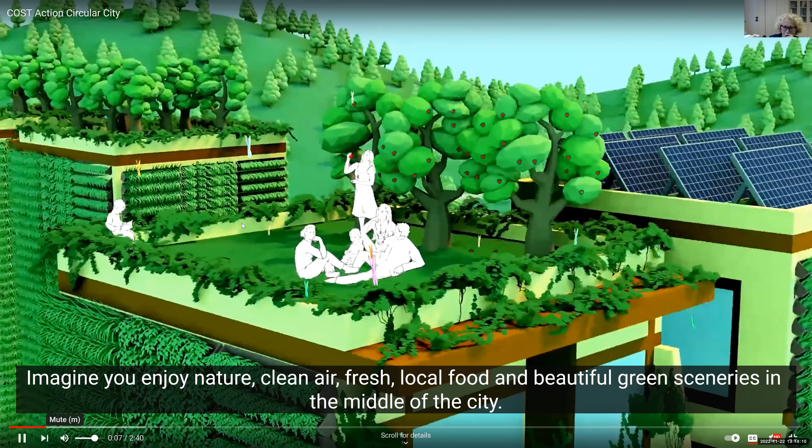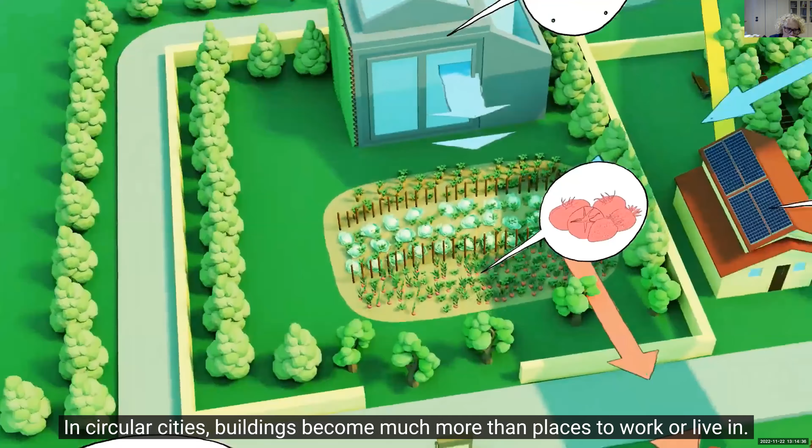Imagine you enjoy nature, clean air, fresh local food, and beautiful green sceneries in the middle of the city. Imagine cities not just as economic centers, but also as resilient and enjoyable places with nature all around us. Sounds unrealistic and too good to be true? It's closer than you think. The COST Action Circular City connects scientists and practitioners all over the world to work together on circular cities and bundle their research and experiences. In circular cities, buildings become much more than places to work or live in. Houses no longer just consume. There is a give and take with the surrounding environment.

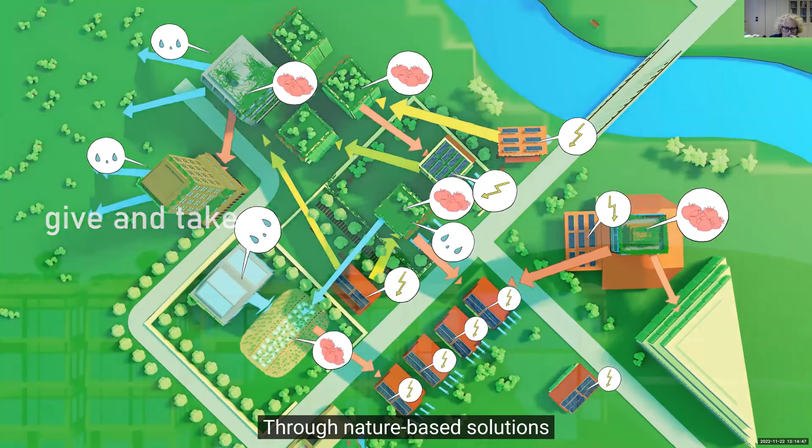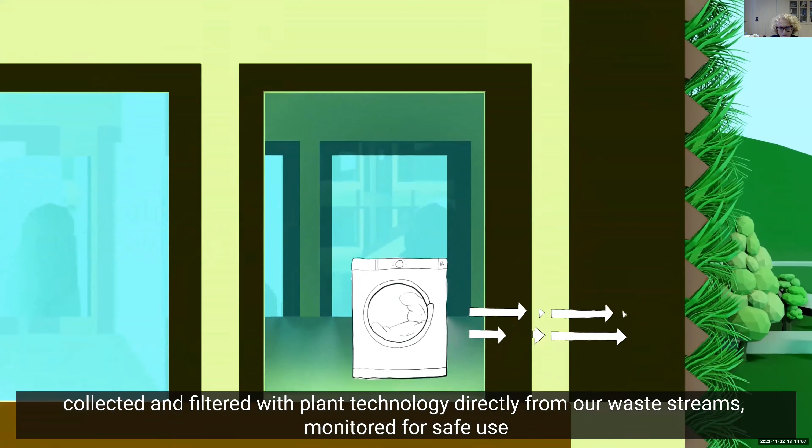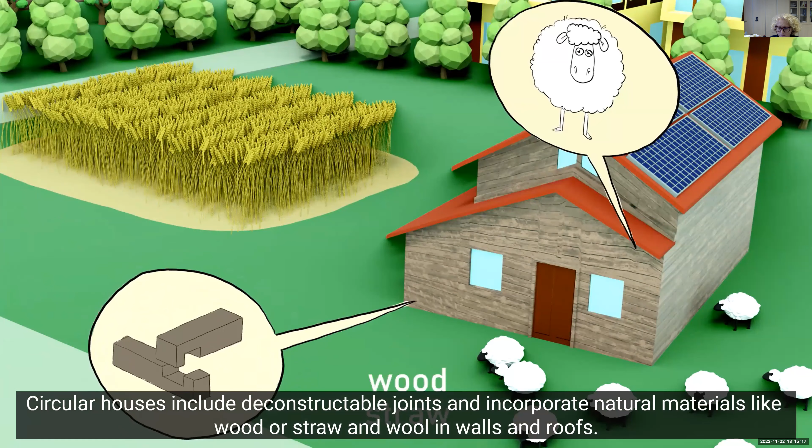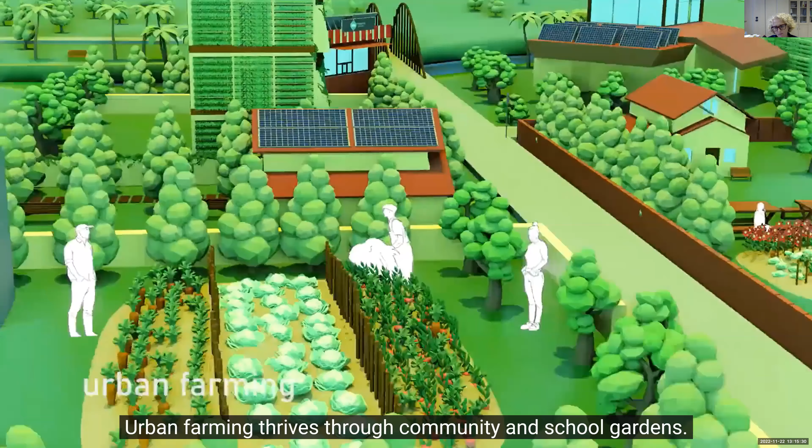Through nature-based solutions, they store energy and provide high-quality service water and nutrients, collected and filtered with plant technology directly from our waste streams, monitored for safe use. For all kinds of integrated food productions, like edible walls or vertical farming, rooftop gardens, mushrooms harvested in our cellars, up to fish breeding in aquaponics. Circular houses include deconstructible joints and incorporate natural materials, like wood or straw and wool in walls and roofs. They contribute to biodiversity and create beneficial microclimates that prevent heat islands, droughts, and floods. Urban farming thrives through community and school gardens. Public spaces become lively areas where water and plants create a fresh climate, even in summer heat, and nature-based solutions absorb stormwater and bind CO2.

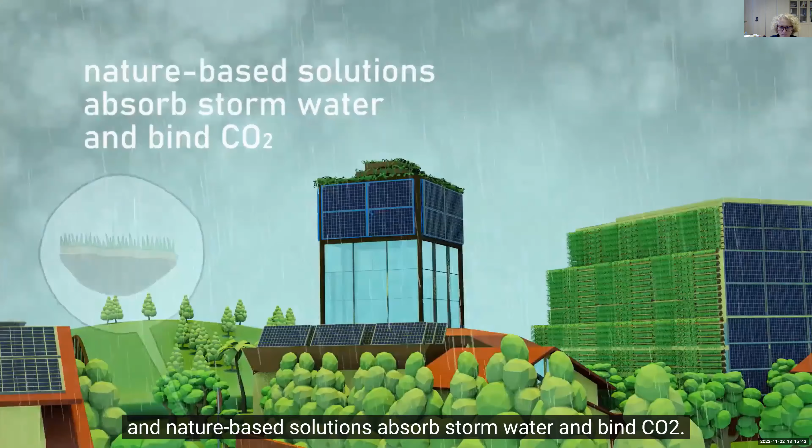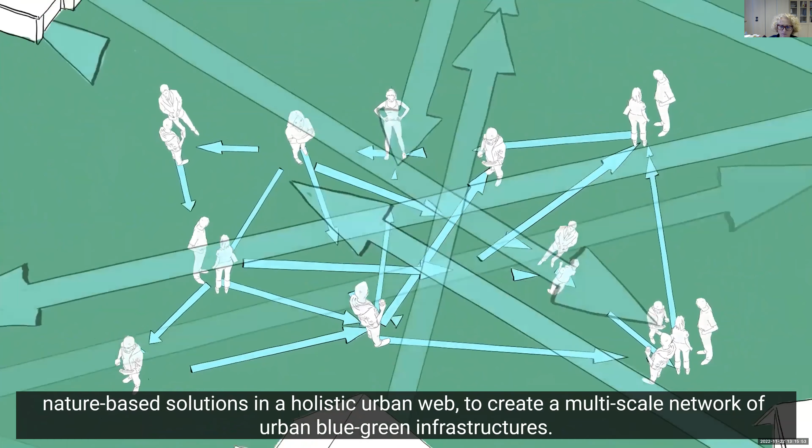Involving a large number of stakeholders and their interests, COST Action Circular City combines the superpower of nature-based solutions in a holistic urban web to create a multi-scale network of urban blue-green infrastructures. Benefits are not just ecological, but also economical and social.

This Cost Action gathers experts all over the world with the knowledge, expertise, and tools to support you in your communication, planning, designing, and assessing of circular cities. We present sound solutions to the decision makers and implementers so that we can start building the cities of tomorrow today. Contact us now.

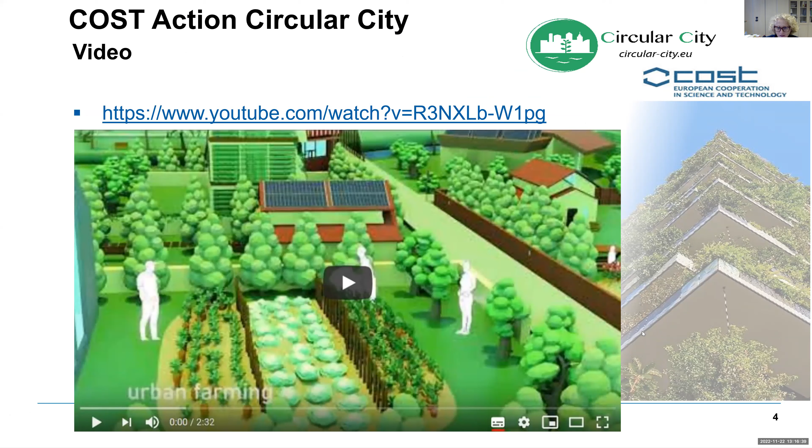Okay, so that's our cost action, dealing with all sorts of aspects of circularity in cities. And for that, you can imagine we have a large network of people working on this cost action, and we have basically involved all eligible countries plus associated countries.

I'm sorry. Millions of people all over the world. I have to stop this. Sorry. So basically,

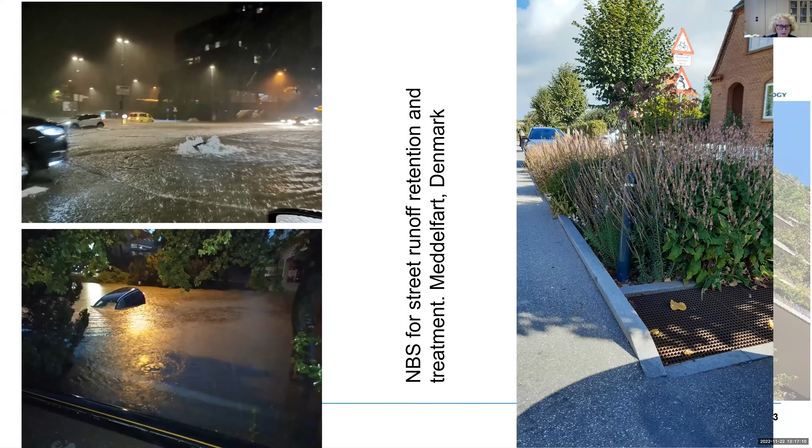Here we are. So basically, we have a network of more than 640 persons interested in the cost action and working together on nature-based solutions. The main deliverables of our cost action you can find basically in two special issues. One is Blue-Green Systems, where we did a large revision of the state-of-the-art on existing nature-based solutions. So there's a collection of papers.

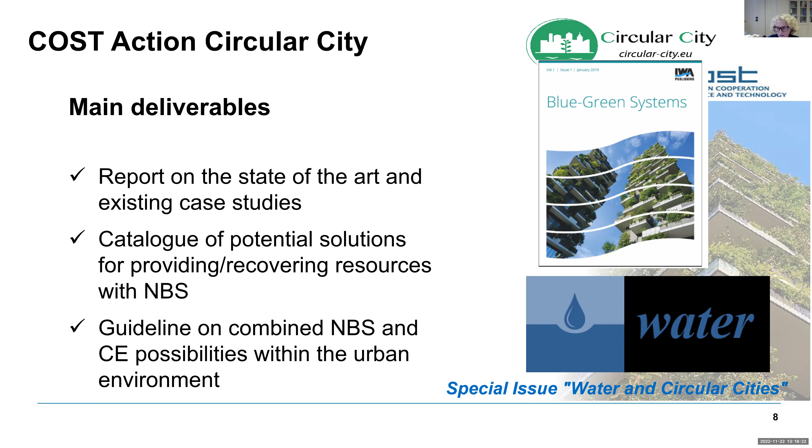And then the other one is a special issue in the journal Water, where we presented in a series of papers a catalog of potential solutions for addressing the urban circularity challenges. The last outcome of our cost action is yet to come, and this is basically a toolbox, a platform for estimating the efficiency of nature-based solutions or combined nature-based solutions to address certain urban circularity challenges.

So the framework that we have developed in this cost action is composed of a catalog of technologies. First, of course, we defined and specified better the urban circularity challenges, which I will show in a moment. But then we cataloged nature-based solutions in a sense that we define them as units. And a nature-based solution is actually a combination of these units.

And of course, we are doing the analysis of inputs and outputs, or better say, the streams of resources that are going through these nature-based solutions. So in a way, if you compose these nature-based solutions in an appropriate way, they will provide circular streams. That's the goal. So this is the catalog of the nature-based solutions. All of them are described and specified more in detail.

So we have identified 39 units, 10 supporting units, and 12 nature-based solution interventions. The supporting units are not really considered nature-based solutions, but they are helping nature-based solutions. So particularly when we talk about circularity, if we talk about resource recovery, then we have a set of options that can help nature-based solutions to recover, for example, phosphorus or energy or other resources.

But we have 7 groups of nature-based solutions. So here we have the rainwater management group, remediation, treatment and recovery, food and biomass production, public green space, vertical greening systems, river restoration, and soil and water bioengineering. Of course, all of these units are multifunctional. If you have a unit from rainwater management, it can also be a unit that provides food, for example. So they have multiple functions, and this is basically the point of nature-based solutions, the multifunctionality.

Now, about the urban circularity challenges, of course, these units were cataloged in this way in order to address these challenges. So it is kind of a framework that we have composed so that we can systematize the use of nature-based solutions. It's a conceptual approach. And basically, the 2 general challenges of a city are how to minimize the import of new resources and how to minimize waste. If we achieve these 2 general challenges, then we are living in a circle, basically.

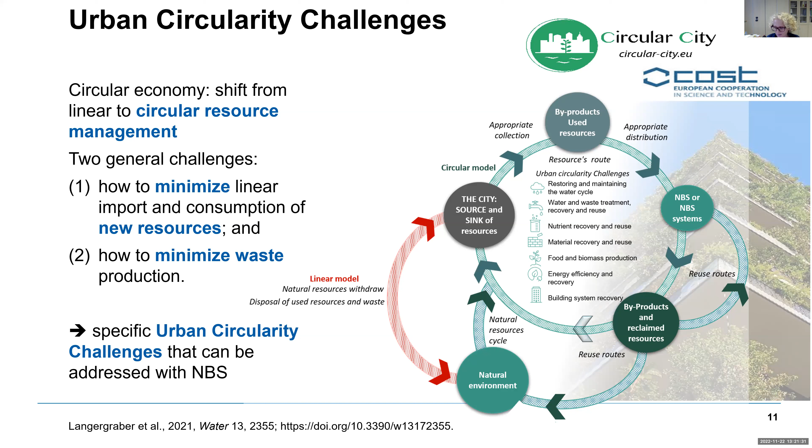But to be more specific, we have defined 7 specific urban circularity challenges, which are restoring and maintaining the water cycle, water and waste management, water and waste treatment, recovery and reuse, nutrient recovery and reuse, materials recovery and reuse, food and biomass production, energy efficiency and recovery, and building systems recovery. So these are the 7 specific challenges that are leading to the 2 general challenges.

And here we have also the urban sectors. The urban sectors are basically considered as fields of activities within an urban setting that are dealing with these challenges or with management of resources. And these are urban water management, built environment, urban farming, and resource recovery.

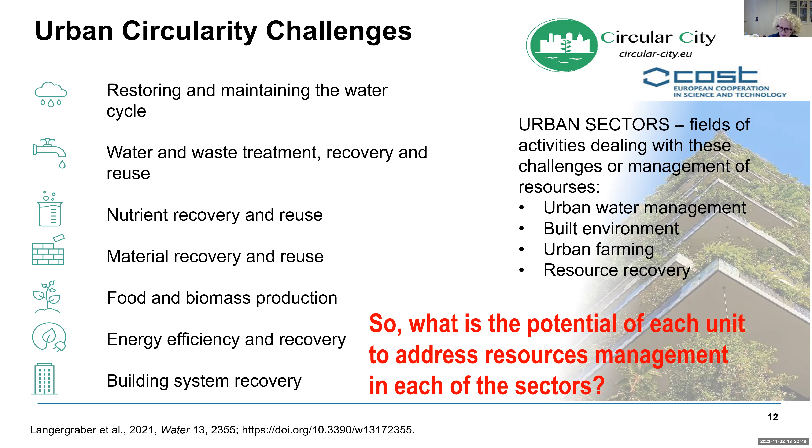So now the question is, what is the potential of each defined unit to address resources management in each of the sectors? So for this, we asked people that are working in these sectors, and we performed a series of workshops and activities in order to gather, like, we had 10 workshops.

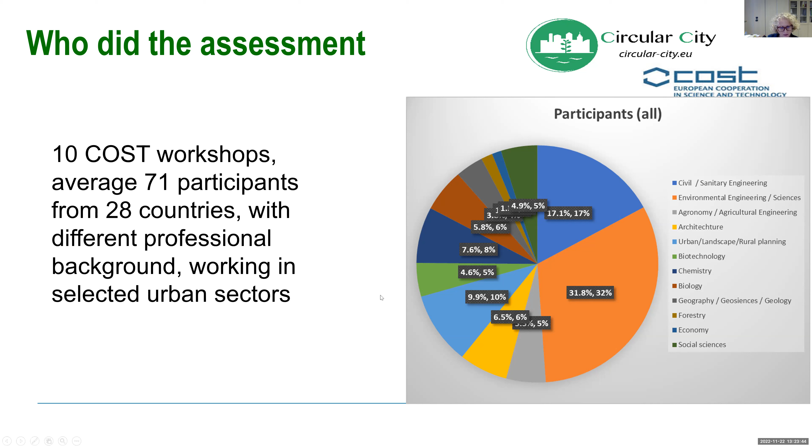On average, we had 71 participants from all the sectors and from 28 countries with different professional backgrounds, and they were working in the selected urban sectors. So this is basically a graph of the professional distribution of the contributors, and you can see that most of the participants were from the engineering profession, but of course we had people from almost all relevant professions selecting how nature-based solutions can address these sectors.

So the analysis showed two interesting results. Only 5 nature-based solution units were selected as relevant by all sectors, and these are treatment wetlands, phytoremediation, street trees, large urban parks, and pocket garden parks. And if we go to the sectors, we see that in urban water management, almost all nature-based solutions are found useful, and they can contribute to more circular management of this resource.

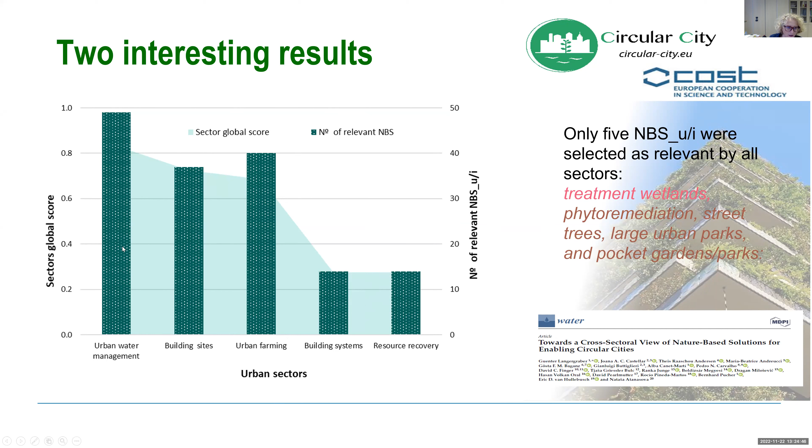Then in urban farming, we had quite a lot of units as well. And in building systems and resource recovery, a bit fewer selected nature-based solutions. So we find this quite an interesting result.

And one more outcome I would like to present: the Circular City online course. This online course captures almost everything that we have developed within this COST action. It's a completely self-paced course, and it is published on the CapNet platform. The course will be open until the 20th of December this year, but we will have another batch as well.

The course provides a learning experience that really tries to overcome the disciplinary gaps, because nature-based solutions are about that. And it has 4 modules: resources, flows, and management in cities; nature-based solutions for a circular urban metabolism; design requirements for nature-based solutions; and implementation of nature-based solutions.

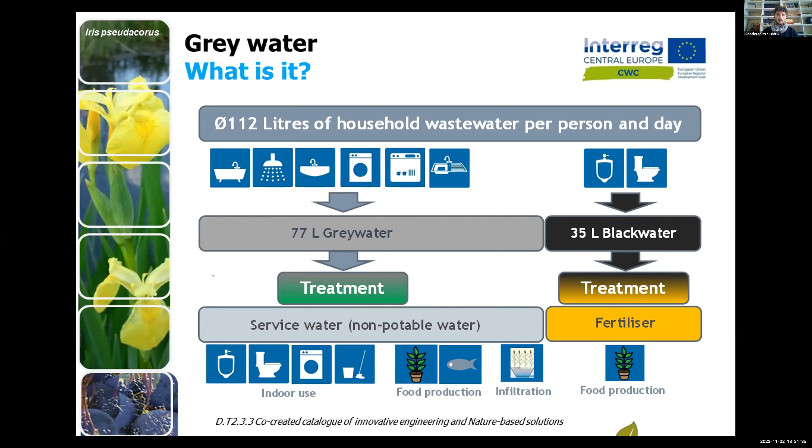So what we talk about is vertical systems for treating and reusing gray water, because NBS are quite well known for this application. Treatment wetlands have been used for at least the last 10 years for this application successfully, but we know that NBS are quite extensive solutions. So there is an increased amount of interest in trying to find alternative spaces to do this by NBS rather than gray infrastructure. In this case, we can do it also on green roofs, but I want to stress a little bit the vertical systems because it's quite innovative.

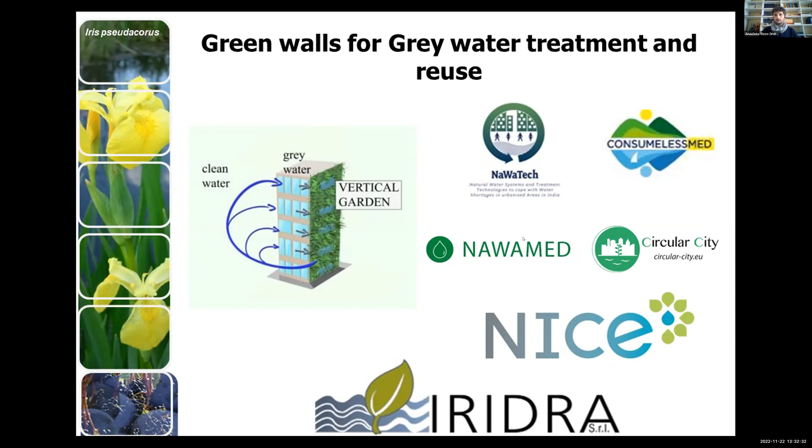And at least for us as Iridra, it is a success story that is starting back from a relatively old research project. And all these projects, I'm going to slowly talk about which was the role. But starting from NAWATEC, NAWATEC was a very big Horizon FP7 project in which Iridra was involved as a partner with many different applications on sustainable sanitation. In this project, we had the possibility to start to implement one of the very first demo sites in real conditions of a green wall for treating gray water, in the Pune student hostel.

This was a very small demo, but we immediately felt the importance to go to real scale, to see what happens with real gray water, not synthetic gray water. This demo started to be designed in 2014 and was monitored up to 2016. And this is actually the very first publication in an IWA journal on a green wall for treating gray water and reuse. So essentially, we were the first in literature that started to talk about it, and we provided monitored data about it. But it's the first step.

So for those of you that are aware of the technological readiness level definition, we cannot say that we were higher than 5 in this case, because it was really a first trial in a real environment of this application. Then, starting from this experience, in Iridra we like to do a little bit of Don Quixote, you know? So we like to try to go real, even if the evidence is not so high.

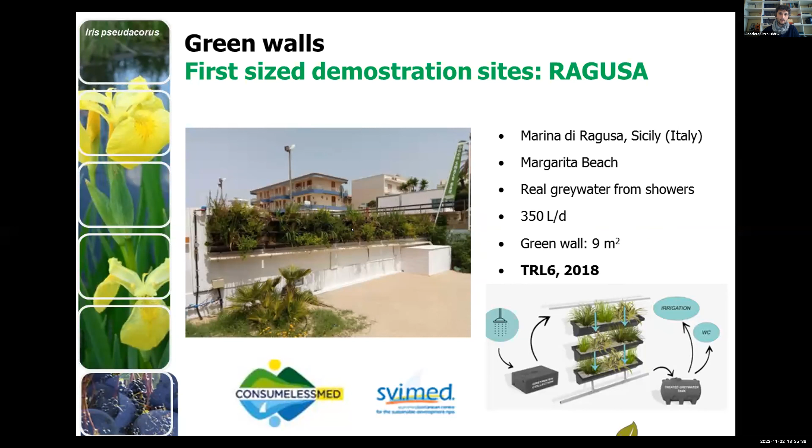In this case, it was interesting because we didn't have money for monitoring in this project, and that is the key of research and development, actually. But going to this scale started to give us important insights into which challenges must be won in order to make this green wall real, because a demo site of 2 square meters is one thing; if you start to green a wall in general, you start to have different challenges. Then, in parallel, we have also been involved in more pure R&D projects, because we were involved with the Polytechnic of Turin in collaboration with the Technological University of Lisboa in the Super Green project.

This was a small project internal to the Polytechnic of Turin, but in this case it is indeed the opposite of the demo of Consume Less. We have monitored in detail many aspects that could affect the design. So we had the evidence that we needed to properly design these systems, because we have tested different plants, different combinations of media. We had a detailed design, a detailed monitoring that tells us what is working better,

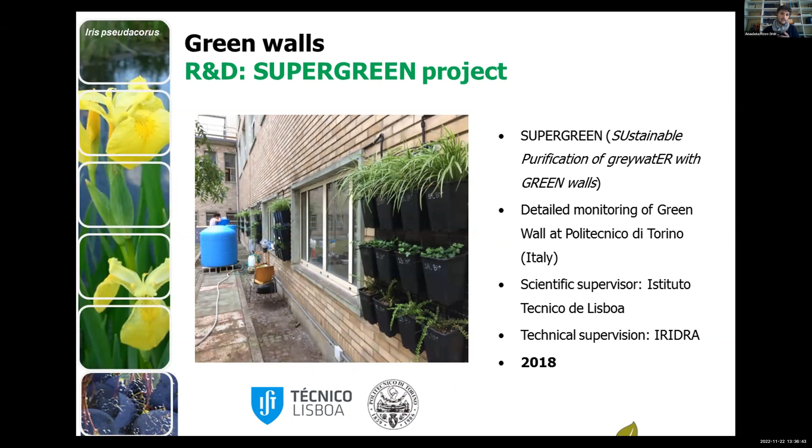what is working worse. And so, in parallel to going real in Margarita Beach, actually engineering these systems, we also collected, thanks to collaboration with academia, basic research evidence from the Super Green project. And we published, for instance, this big review, highly cited, about NBS for grey water treatment. So we have really gone through every detail of basic research, I would say in this case. We started to share the knowledge with a bigger group.

Again, in the circular city presented by Natasha, we have developed a cluster in which we share the knowledge, because this started to be talked about in 2016 in literature. So there are many research groups running in parallel, completely from scratch, with similar results. It is important to share experience and failures also. And thanks to this body of knowledge, we arrived in 2020 and realized in 2022 a system that upscaled much more.

Here we are talking about the Wall2Water systems that we have designed in NAWAMED. It's a completely different scale, because essentially we are treating 10 times the grey water of the previous experience. We are treating real grey water from the wash basin of the primary school in Ferla in Sicily. And we are covering 30 square meters of wall surface that is treating grey water. So it's a completely different challenge from conventional design of green walls,

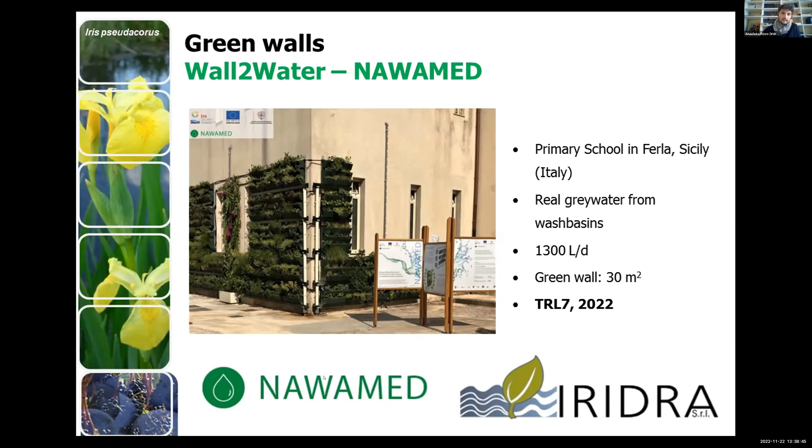because it's changing the media, it's changing the feeding systems, because we cannot use self-compensated drippers because, for instance, they can clog. We have done monitoring, design, modeling to reach a level of TRL 7, thanks again to the fact that we have been funded by NAWAMED. And here you can see it finished being installed at the end of this summer, and now it is ready to receive the grey water. And you can see some pictures.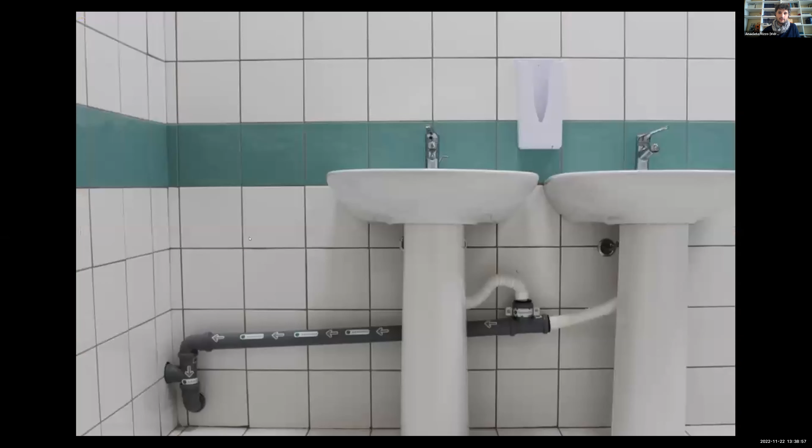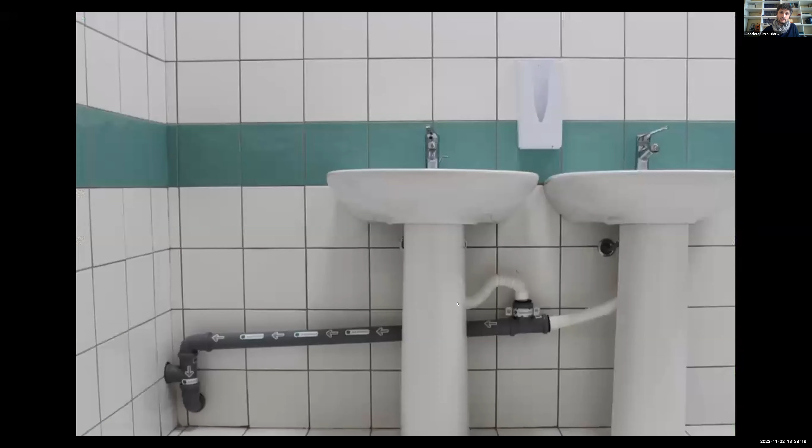I'm scrolling down. It was a challenge also to design how to intercept existing grey water. For instance, we created a separate sewer from the wash basin of the school. This grey water comes outside from the building and goes down to a pumping station that is feeding the green wall. And then this pumping station collects the grey water again and it goes back inside the bathroom of the school to recharge and be used for toilet flushing.

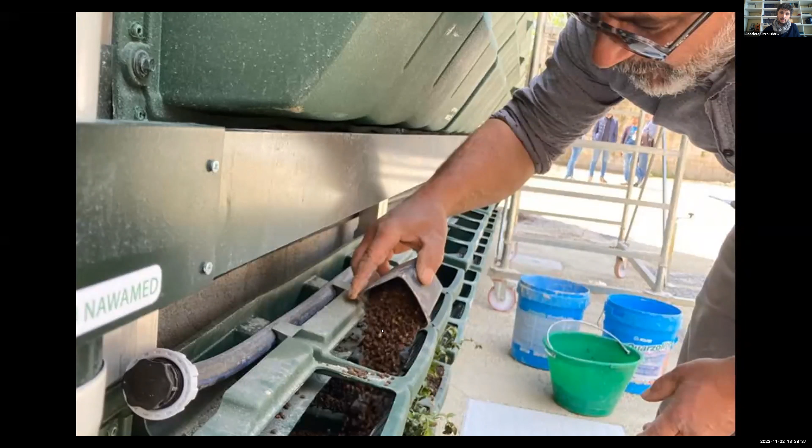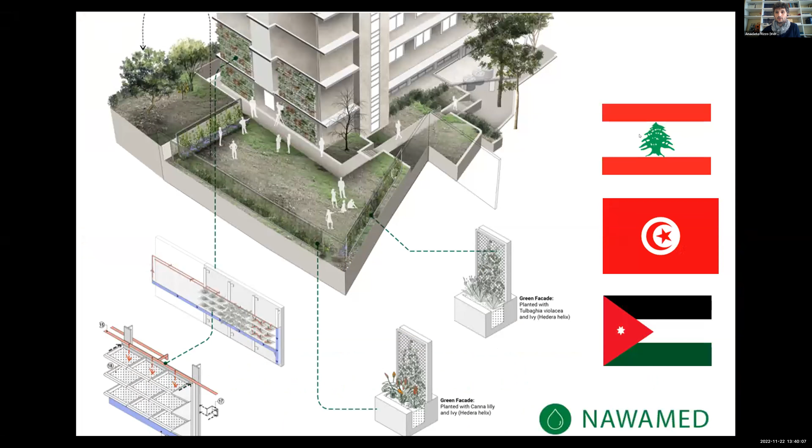We have selected the right module, the right feeding systems, the right media, the plants that could survive the environment, and it's starting to be a nice place also for sharing knowledge. We have a dedicated web page for these systems. We started to monitor these systems, and we hope to publish our results soon. This was a big step that is going to be replicated in the NAWAMED project also in other countries, in Jordan, in Tunisia, and in Lebanon.

And I want to conclude my presentation, slightly delayed, I'm sorry, telling you that we still didn't finish our job, because we have to reach TRL 9, so a solution fully available for the market. And for doing this, we are going again to exploit the possibility to be financed by a European project, NICE, the one that is hosting these activities.

And again, with the same group, with Polytechnic of Turin, essentially we are doing a Supergreen project 2.0, because we are doing stress tests on the same demo sites at the Politecnico. We are stressing the system, overloading the system, using high detergents to see if the system is resilient enough to really go into the real market and to be designed and sold in the real market. Thank you very much.

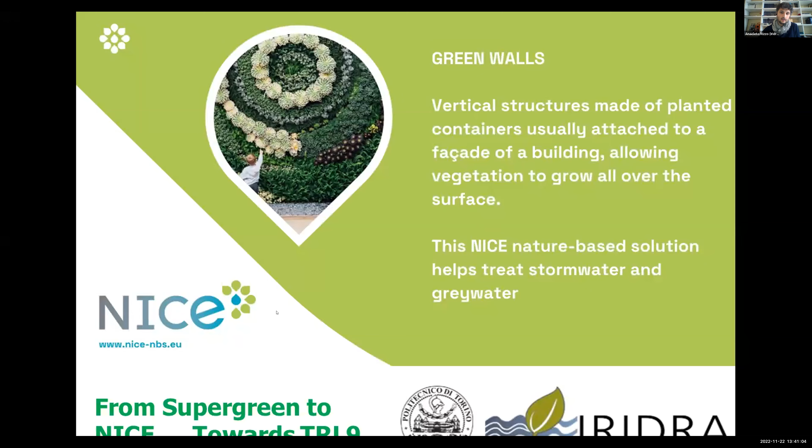I was a little bit late, sorry, Gerardo.

No worries, Anacleto. Thank you very much. I have to say it's really a pleasure to hear about IRIDRA and what they are doing, because you are front runners in the implementation of nature-based solutions, really impressive projects. And I would say you are like a role model to look at when we look at this type of solutions. So I think there are no questions related to the presentation. I'm aware one of the urban labs in the NICE project is in Malaga, so I will keep an eye on you and hopefully visit some of the sites here in Malaga.

If I may add only one quick claim, Gerardo, about the NICE project: the stress test in Politecnico is the basic design part of NICE. Based on these results, we are almost concluding this test. We are going to design real green walls in real conditions in urban real labs. One would be in Turin and the other will be together with Aqualia, also with Ivan, in Spain. So we are moving the knowledge from the stress test to real systems inside the NICE project. Super. Thank you for this clarification.

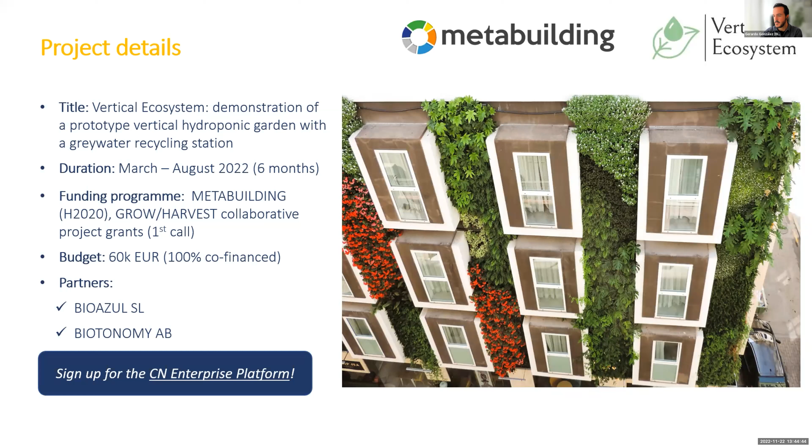At this point, I would like to highlight that both companies got to know each other through the Connecting Nature enterprise platform, and this open call that we applied to was announced in the platform. So thanks to the platform, we developed this project. The main goal was to demonstrate and validate an innovative solution to integrate NBS into existing buildings, applying a circular economy approach. In this sense, we designed a prototype consisting of 2 modules. One is the greywater recycling station, connected with a vertical hydroponic garden. We would also test and evaluate it in a real and operational environment here in Malaga.

For this, we had the commitment and support of a 4-star hotel here, Hotel Mariposa, that offered the facilities to implement this prototype. To irrigate and maintain the garden, we would treat and reuse greywater from 2 hotel rooms that would cover 100% of the water demand of the vertical garden. I will tell you a little bit more in the next minutes. We would also implement some elements for automated and telematic management through fertirrigation with nutrient control, and this way minimize the maintenance of the garden.

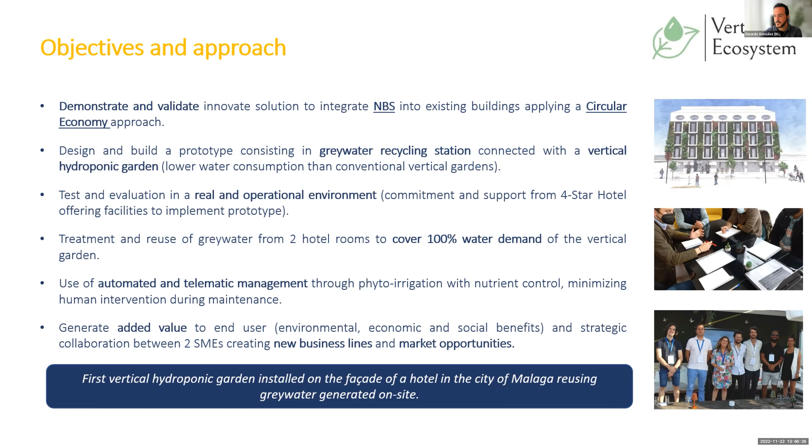Finally, also very important for this project was to generate added value for the hotel with environmental, economic, and social benefits, and also for the 2 participating SMEs, because we could create a new business line and market opportunities for both companies. In fact, this would be the first vertical hydroponic garden installed on the facade of a hotel in the city of Malaga, reusing greywater generated on site. So I will give you a bit of an overview of the prototype.

First of all, the greywater is collected from 2 hotel rooms and redirected to the basement where the greywater recycling station has been installed. It has a treatment capacity of 400 liters per day, and the water is treated following a biological and ultrafiltration process to remove suspended solids, microorganisms, and so on. The treated water will be reclaimed water. This is the name we give to wastewater which is treated for a certain purpose. It also receives a disinfection treatment to preserve the quality of the water before it is used.

Then from the basement, reclaimed water is pumped up to the rooftop of the hotel, where it is stored in an irrigation tank with a capacity of 2,000 liters. Thanks to the monitoring and remote control system, the nutrients necessary for the plants are added there to optimize the use. Afterwards, the water goes through the irrigation system to maintain the hydroponic garden with a total surface of almost 100 square meters and around 2,500 plants.

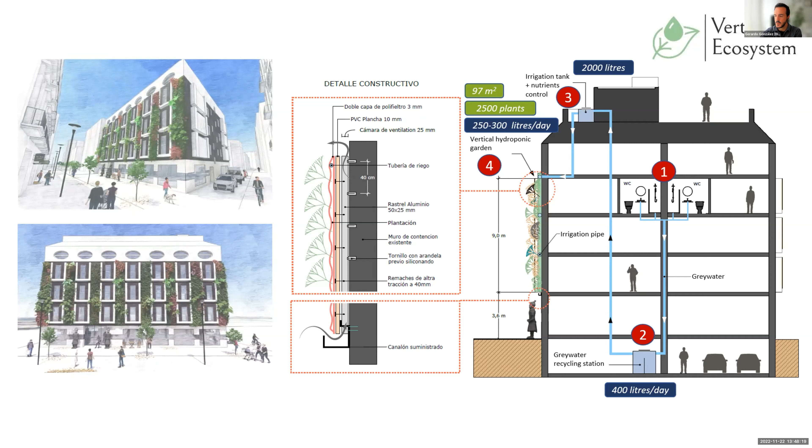Thanks to this hydroponic system, the consumption of water is much lower in comparison with other vertical gardens. We have calculated around 250 to 300 liters per day. Also very important to mention is that the prototype includes a backup system to use fresh water, just in case there is any problem with the treatment plant or the composition of the greywater and so on.

The grey water recycling station provides a treatment of several steps. First, there is a removal of hair and other residues. Then there is a biological oxidation, filtering process using membrane, and chlorination for disinfection of the water. The biological process is going to degrade the organic matter, and the ultrafiltration membrane will prevent the presence of pathogenic microorganisms.

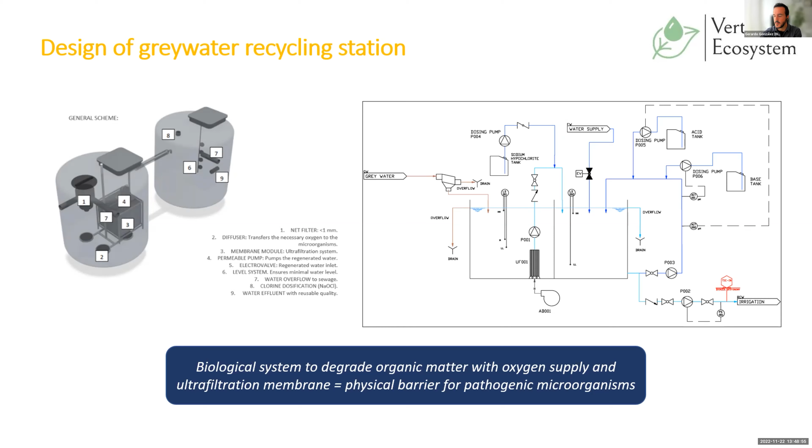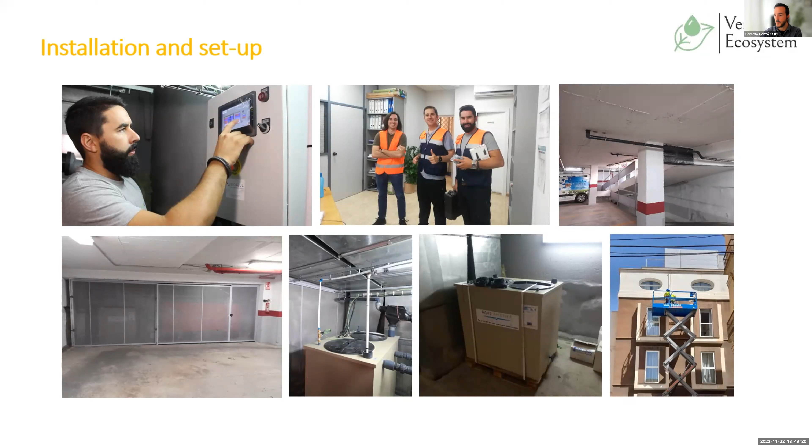As I mentioned, the grey water recycling station has been installed in the basement of the hotel. And because the hotel doesn't have a separate network with pipe work for the grey water, something similar to what Anacleto was explaining, we had to redirect the grey water from the 2 rooms to the basement and to the recycling station, and later on it would be sent to the rooftop.

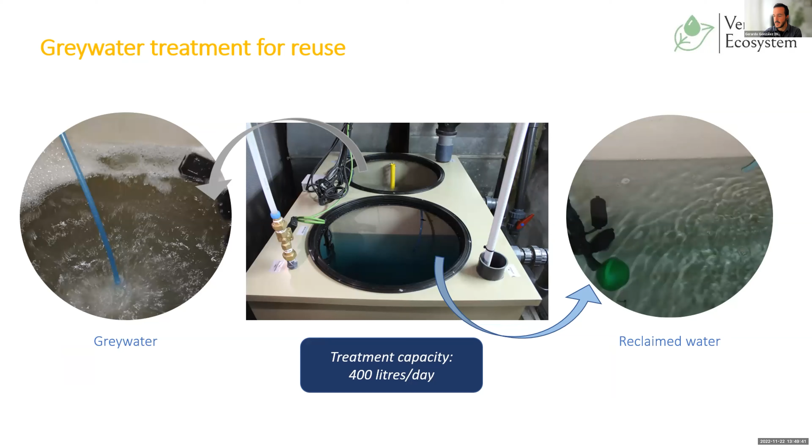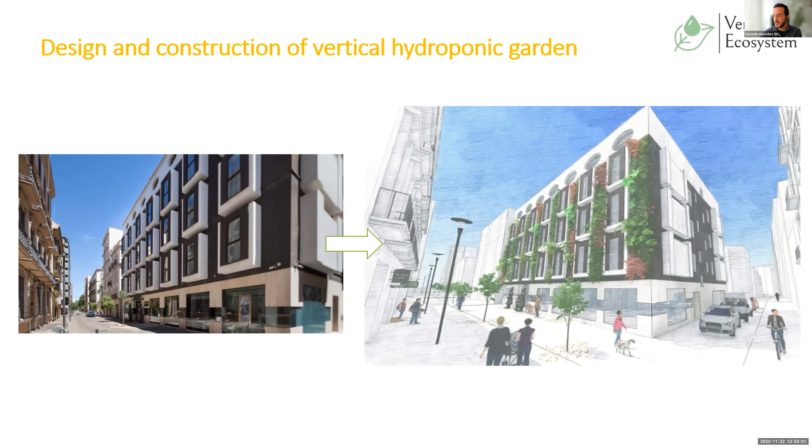After the treatment process, from grey water to reclaimed water, we have some dosing pumps to correct the pH and the electrical conductivity, and then we adapt the quality of the water for the vertical garden. And at the same time, in parallel with the water line, the vertical hydroponic garden was designed and was built on the front facade of the hotel, covering the vertical stripes of concrete between the windows. And I would like to mention also that this was a pioneering project here in the city.

So we faced the first challenge when we tried to acquire the construction license, because Malaga, as well as many other cities, has a strong architectural and urban heritage, and several buildings are protected with strict regulations, and some innovative architectural features are not considered yet. So the regulatory framework was kind of outdated, and it didn't mention anything about green facades. So for this, we had to collaborate with a well-recognized architect here in Malaga to try to convince the municipality.

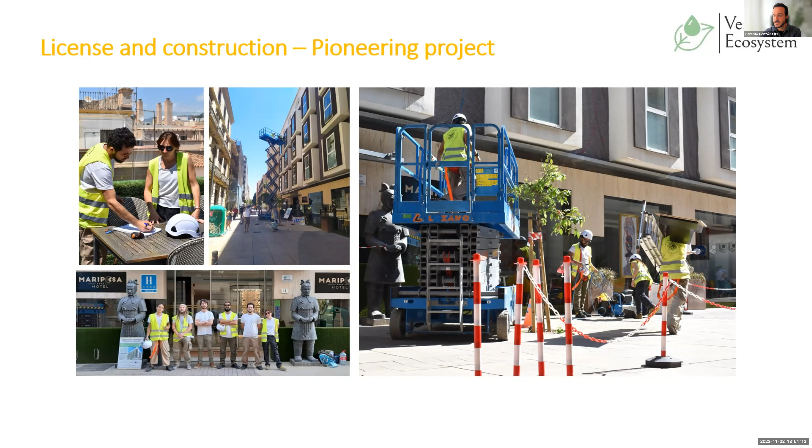And I would say that it was also very important to have the endorsement of the European Commission, because we were positively evaluated by a panel that recognized the project, and this was really a strong instrument to get the license to start the construction.

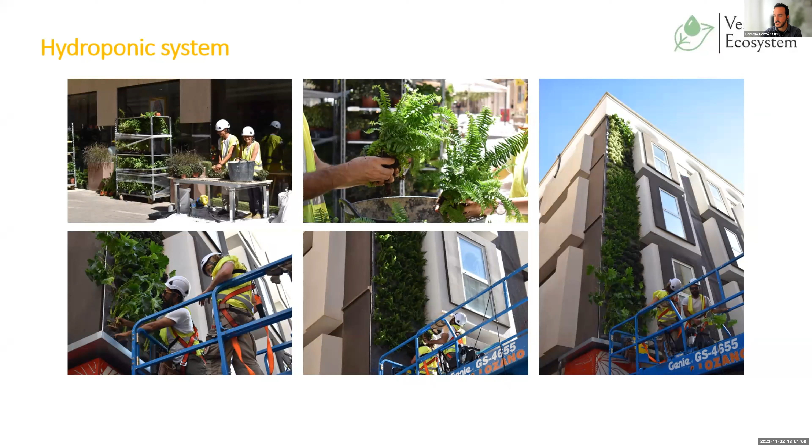The anchorage system used in this case allows us to have this hydroponic garden. It doesn't need soil, and there are different layers, like different panels installed on the facade. One of them is a textile layer that is serving as a substrate, as a support for the plants. And this is where the irrigation pipes are located using drippers. And there are different irrigation sectors on the facade. And because of this arrangement of layers and some air chambers between the layers, this is a very light structure, around 32 kilos per square meter.

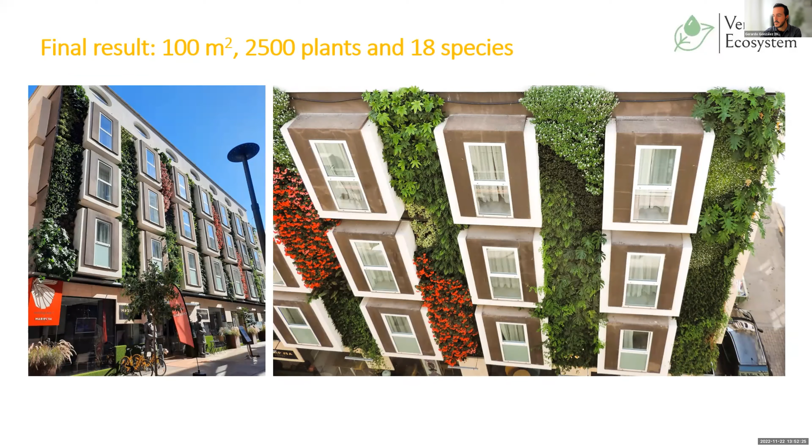Also, the selection of the plants was made carefully according to the Mediterranean climate, the incidence of the sun, in this case a north facade, the power of attraction of pollinators, the interaction between the different species, and the aesthetic value was also considered. And based on literature and similar projects, we have estimated some positive impacts. For instance, the vertical garden could produce the necessary oxygen for 100 people per year. It could absorb 230 kilos of CO2 and 13 kilos of dust. It filters around 65 tons of harmful gases.

It could also regulate temperature, reducing the temperature up to 5 degrees indoors and 3 degrees outdoors during summertime. It can reduce up to 40% of noise from the street compared with conventional facades. It also increases urban biodiversity with new plants, new pollinators, birds, and so on. And it also strengthens the identity of Malaga as an innovative and sustainable city. And all this with zero fresh water consumption. So we are also supporting the closing of the water cycle at the hotel, and we avoid the discharge of grey water to the sewage system.

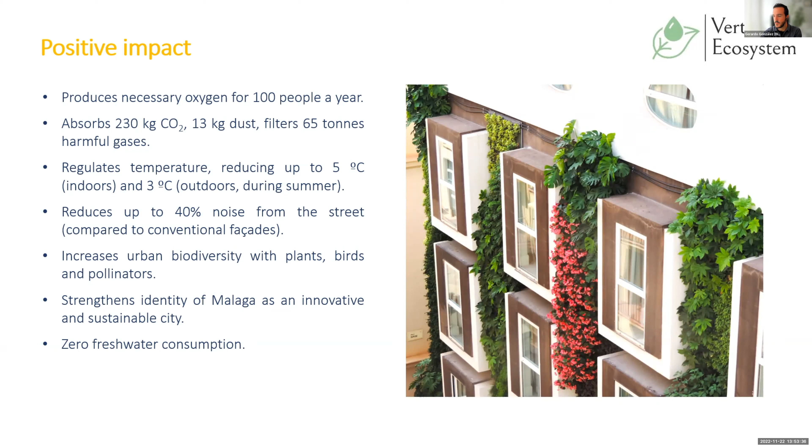And just to conclude, for us it was also very important to capitalize the social impact of this project. We ran a survey on the street, and we had around 70 participants. We asked different questions. I have highlighted the main results, which showed that 94% of the pedestrians and the neighbors believe that public administration should support nature-based enterprises to develop this type of solutions.

90% believe that it should be replicated across the city, and 82% agree that it provides significant benefits to society, the most important ones being saving of water, the improvement of the air quality, the decrease of temperature. And also very relevant for us and for the hotel is that 60% of the respondents are willing to pay an additional cost per room if they were to stay at the hotel.

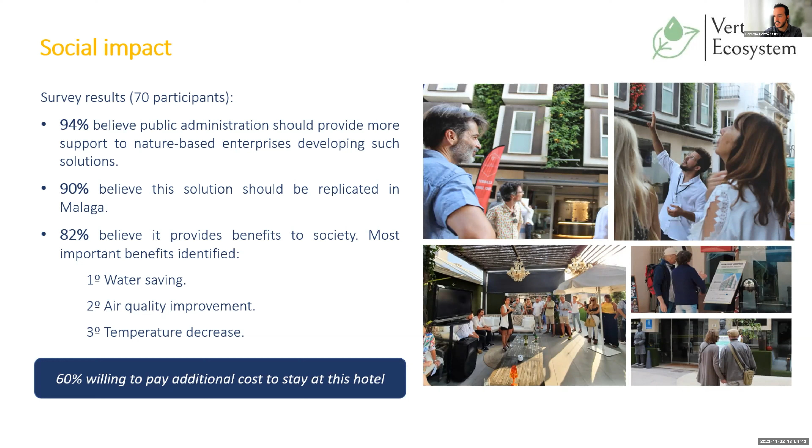So this was also a very nice result to share with the end user, with the hotel in this case.

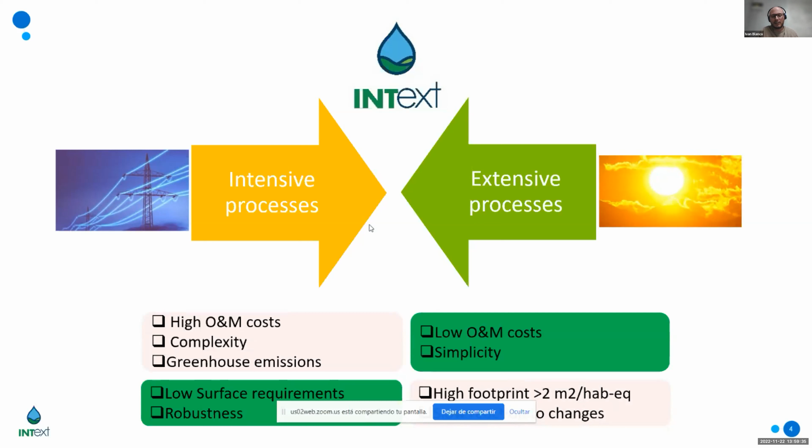So the INTEXT project comes from the concept of integrating both approaches. Why don't we intensify these extensive processes? Why don't we create a new set of technologies that we define as INTEXT technologies, intensive and extensive? So in order to do this, we have created pilots at a high replication scale in 2 locations, in Seville, where we have done some retrofitting of 2 of the wetlands that already exist in the demonstrative platform.

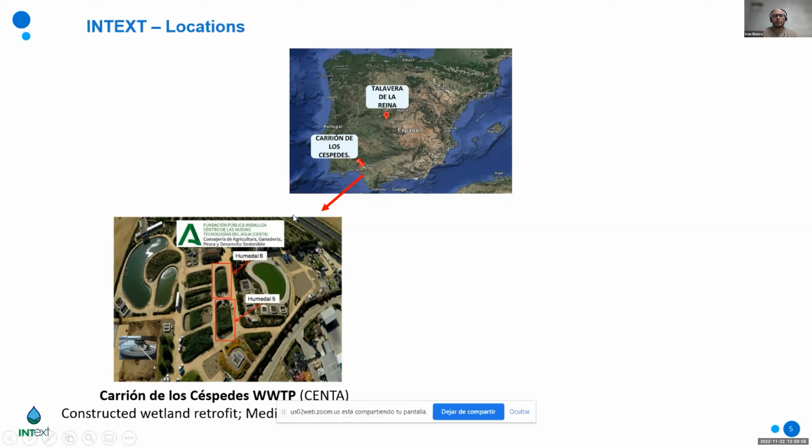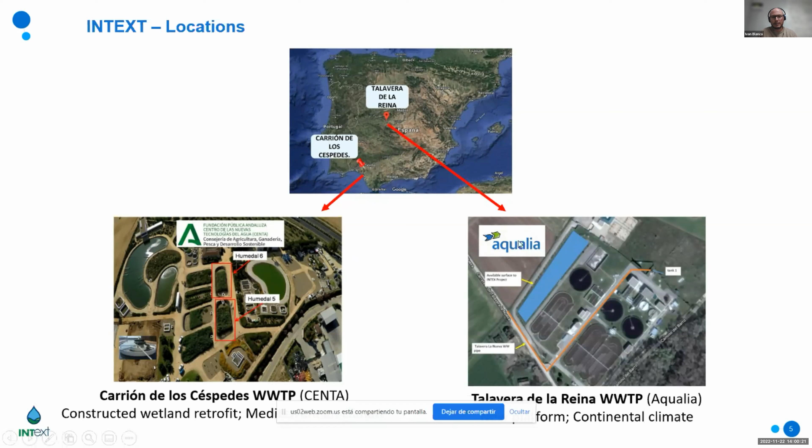And a more ambitious part of the project is that we've built a new demonstrative platform for wastewater treatment with nature-based solutions in Talavera de la Reina, which is a city in the center of the Iberian Peninsula, in a wastewater treatment plant managed by Aqualia. It's property of the municipality, and it is managed by Aqualia, in a continental climate. Today, we wanted to focus on this experimental plant.

And here, you can see a picture of this plant where the construction took place adjacent to the existing wastewater treatment plant. Some pictures on the right show how the plants have been developing during this year. So we're still in the startup phase. And the interesting part here is that this is not only a nice playground for research, where we will be able to compare different technologies and do lots of different nice experiments, but it is also a nice showcase.

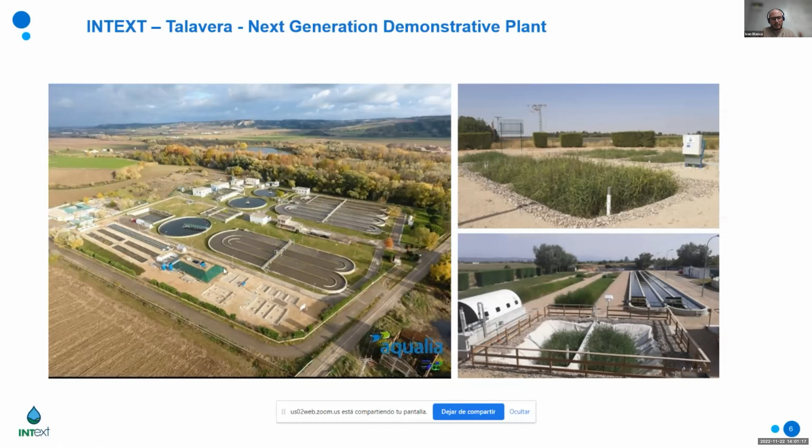So this platform allows the municipalities to come here and see firsthand different technologies that are available for implementation in the market, compare them, in a nice environment as well, as you can see in the pictures. So there's not much time to talk today in this presentation, so I will not go into detail, but I will just go through a little bit of the diagram of the different technologies and an overview.

And here I just wanted to show the diagram, which looks a little bit complex because there's lots of technologies in this platform, more than the 16 different combinations that we have identified. So it is quite interesting in case we want to define the operation of one technology in series with a different technology. It's possible to combine them. And also in the back of the platform, we will also be looking at nutrient recovery, soil disinfection and smart irrigation. So just an overview of different technologies.

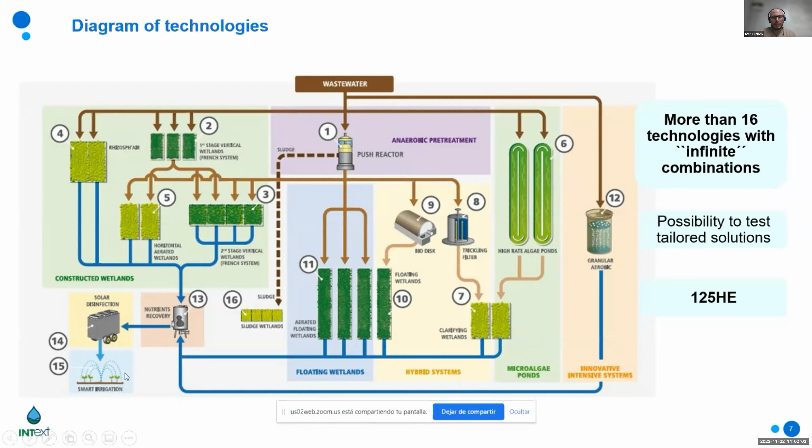So on one side of the platform, we have constructed wetlands. We have a traditional French system, which is one of the most interesting systems for the market. And this one acts as a control, so we can compare other technologies which have been intensified. So we have horizontal flow constructed wetlands with blowers. We have combined vertical flow and horizontal flow constructed wetlands with blowers as well. We have systems after pre-treatment and anaerobic pre-treatment.

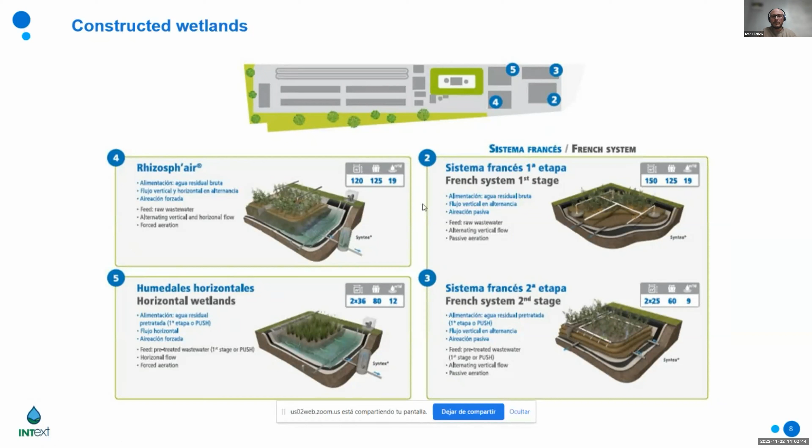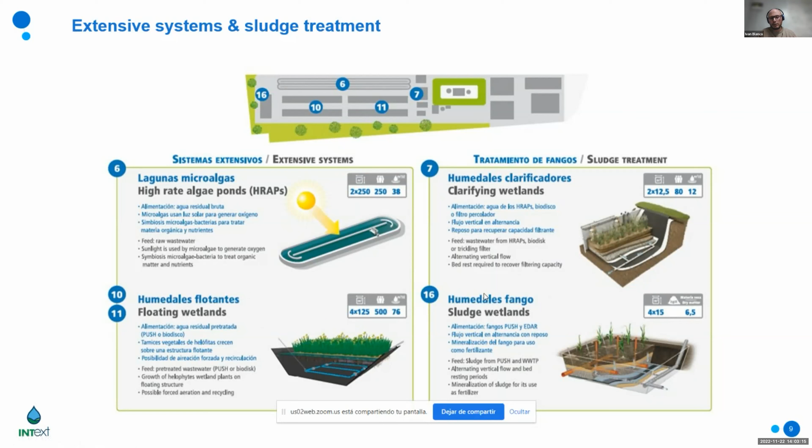We can compare those to high rate algae ponds, systems with microalgae, and floating wetlands, where we have done improvements in terms of hydraulic conductivity, but also with some equipment, some recycling pumps with aeration. We have more wetlands for polishing of solids in the back end, or for sludge, for removal of activated sludge, or accumulation of activated sludge.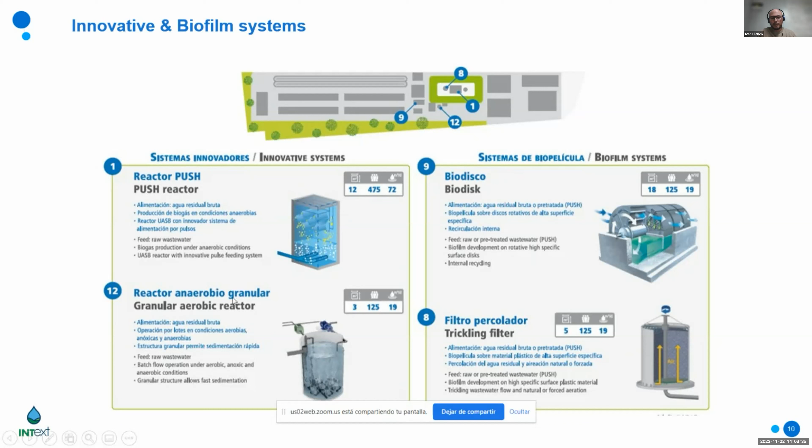And again, more technologies. We have more traditional biofilm systems, such as rotating bioreactors, trickling filters, but also novel systems such as anaerobic pretreatment systems, or a granular aerobic reactor for small populations. So it's a lot of different technologies, difficult to explain in detail. So what I've done is to add a video here, so we can have a peek at this platform. I think it's going to allow me to. Yes, it's showing.

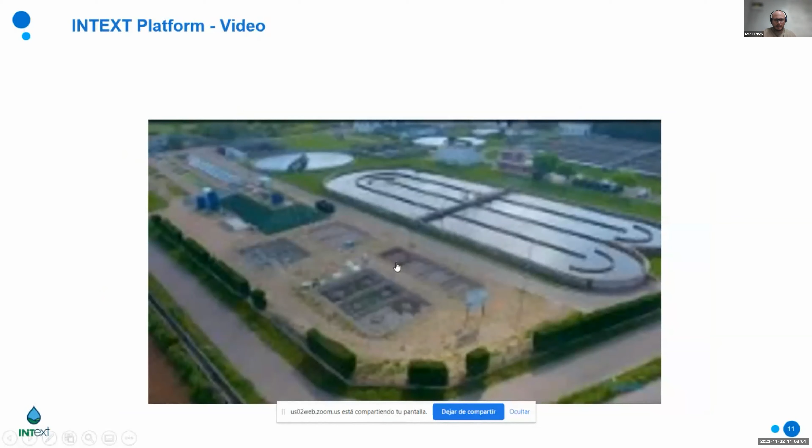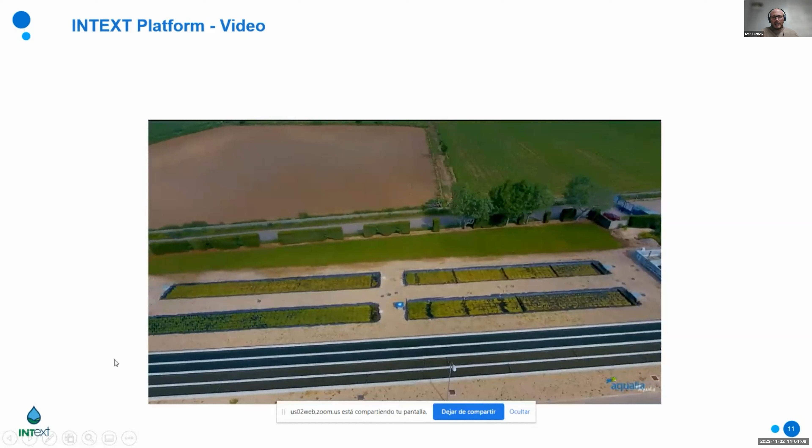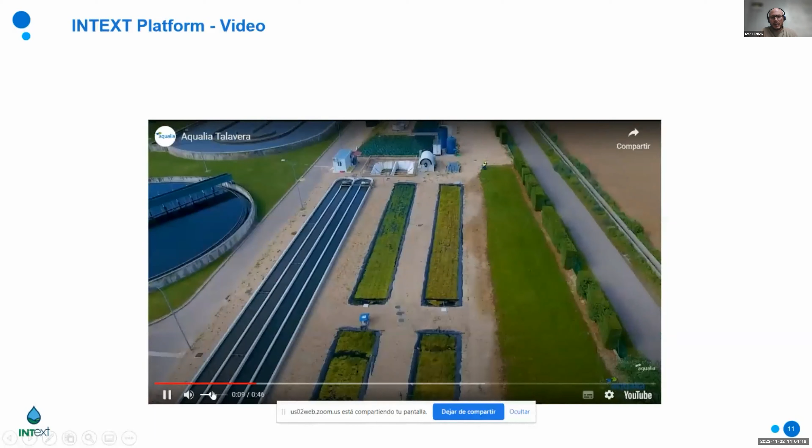It's a short video, so you can see here an aerial view of the platform and the scale of this platform, where we are going to be doing different experiments to compare the different technologies within the context of the INTEXT project. But of course, it will be also a nice demonstrative platform that is available for visit.

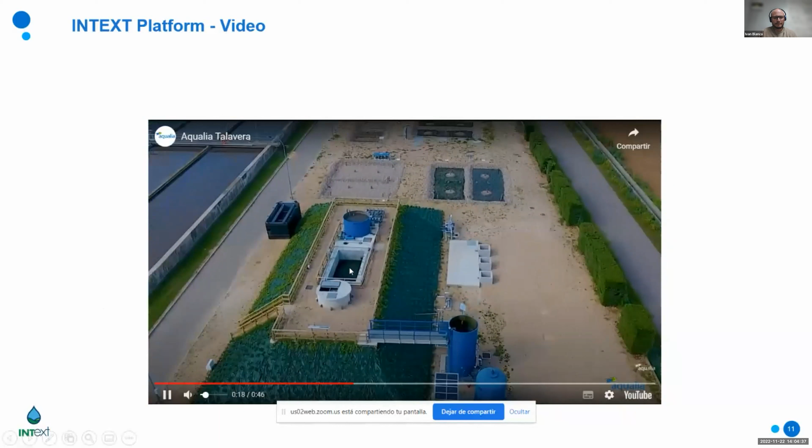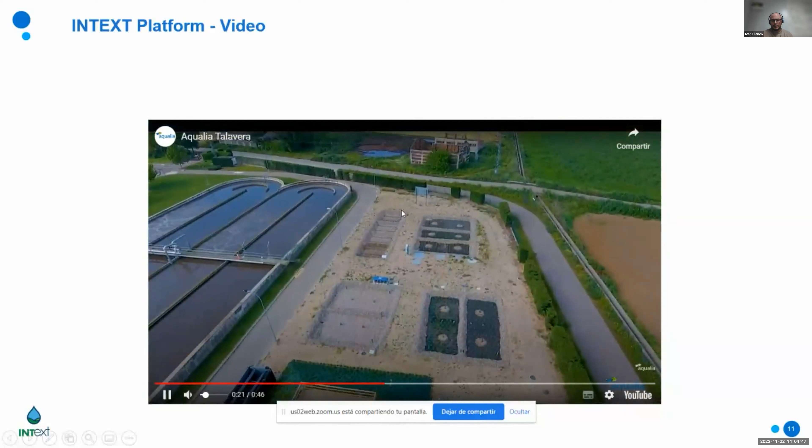And yeah, that's the presentation on this success story on how nature-based solutions are being looked at in larger companies such as Aqualia.

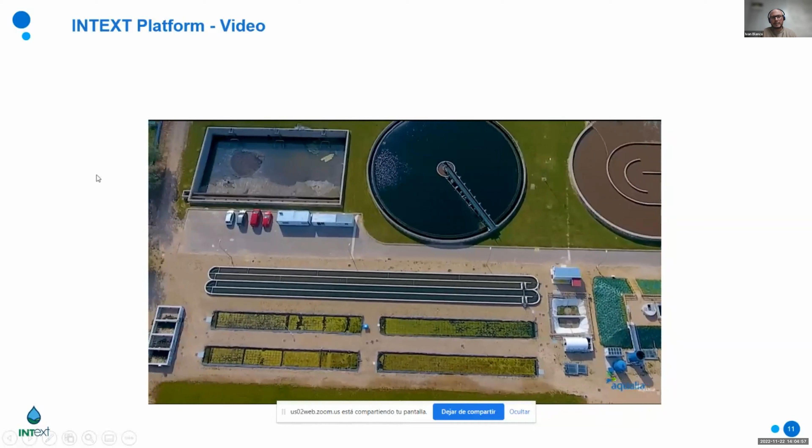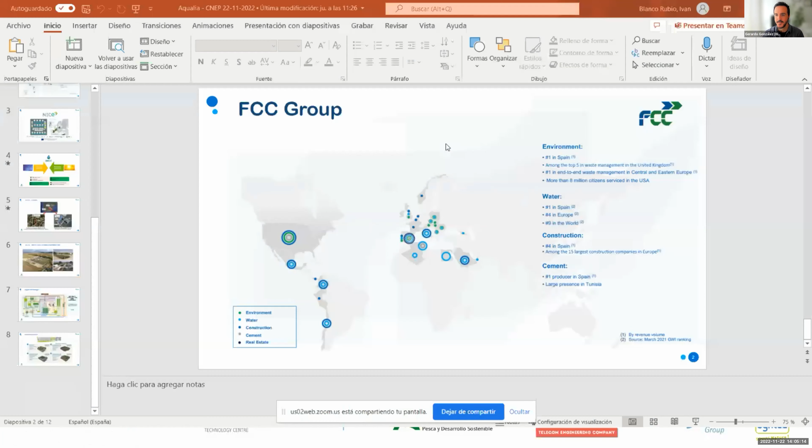Gerardo? Yes. Thank you. Okay, Ivan, thank you very much for the presentation. You have a real living lab, I think, here in Talavera de la Reina, right? With so many technologies. Yeah, it's very interesting, and it's quite an ambitious investment from our company. So we hope to present some results soon enough. Indeed, we will be also paying attention to the new development. As it was mentioned in the chat, it really shows the complexity that this type of systems and technologies can reach. I believe there's a question for you, so if you don't mind going through it, it's regarding the maintenance guidelines on operation.